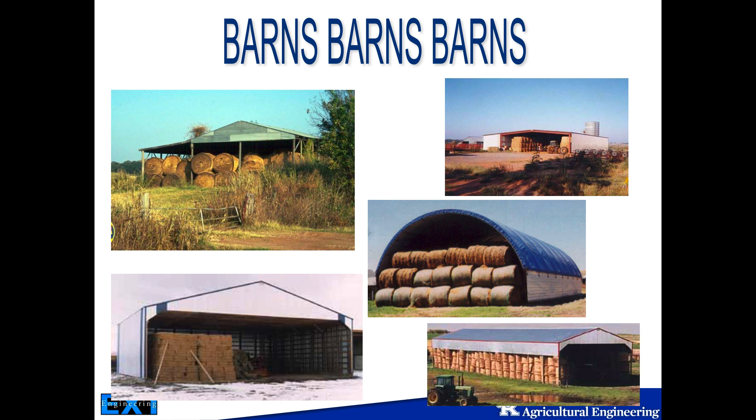You can always retrofit old barns, you can add sheds, you can have metal barns, hoop barns. I don't know how they got the hay in like this, don't ask. There's not a good solution, don't do that, unless you have lots of time on your hands and you're just looking for fun. Creative solutions. And then of course the square hay there in a metal-sided pole barn.

One of the big things I think a lot of people don't spend enough time on when thinking about a hay barn and putting up a new barn is the site selection for it. I see a lot of barns that are not in the right spot, or there's not enough space around the barn to turn around trailers and equipment, where the barn is in a low spot because that's where the drive was. Then all of a sudden you have all that water coming off a hillside, and on a year like this, you know how much water comes off the hillside and ends up in the bottom of your barn, and you don't have enough rock and it doesn't drain properly.

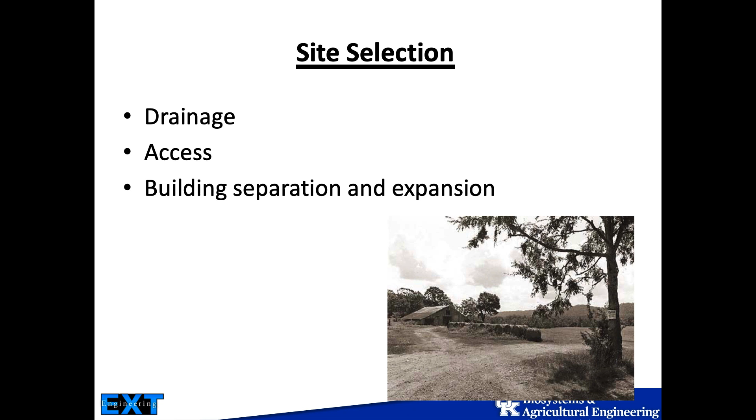So that's a big problem. Drainage is critical, access is critical, and building separation I put up there because of fire risk. This is a trade-off. If we put enough space between our barns for fire management, to make sure barns are protected from other barns and that we can reduce the risk of fire spreading between barns, we have a lot of space between our barns that we have to mow and manage, or spray, or gravel, or do something with, which is a real big pain. So you have to make that decision yourself and how you manage your risk as to how close together you want your barns to be.

We want to avoid low spots and steep slopes. We want the water to drain away from the barn and access area. It's actually a pretty steep slope that's recommended for moving away from the edges of the barn back to the ground - 5% slope. That's not a slope that I really want to drive my tractor on. That's a fairly steep slope that we're looking at here.

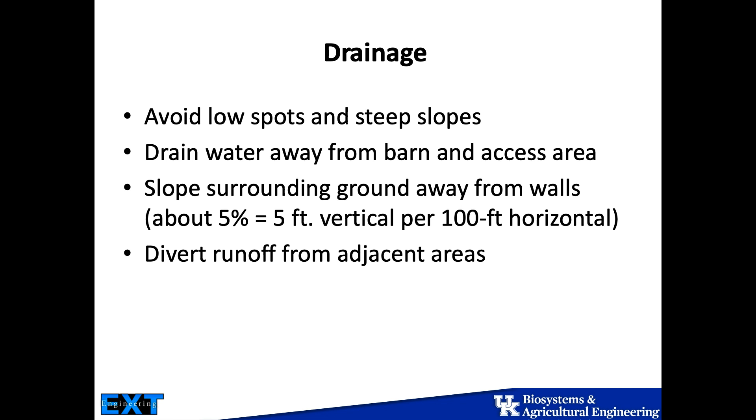And we're diverting runoff away from adjacent areas. So if we do have gravel areas next to our barns, we don't want the water from those gravel areas also running into the barns. We want to make sure that's all sloped away as well.

For access, we want to plan for convenient access. That means we need to be close to our roads. We want to avoid having a lot of gates, because when people are coming in and buying hay - if you're only delivering it, maybe you can handle your own gates yourself, but if you're selling hay and people are coming to pick it up, gates are not necessarily your friend, they make more work for you. On the other hand, no gates means no security. So there's a trade-off there as well.

And then you also need to keep in mind your distance from your hayfield. So setting up a convenient spot for people to purchase hay might not necessarily be the same spot that your hayfields are at.

So you need to balance those two things, because when you're trying to beat rain, which as Josh just said, we had to beat rain a lot of times this year, distance from the hayfield can be a critical component to making that happen.

We want security from fire and from theft. There are definitely people that will steal hay. We need to have some sort of security, lighting, other things like that on the site, preferably visible from a house. Those are things that we really want for the security of our product.

And we need roadways and turning areas to allow ample space for trailers, bale wagons, things like that. 75 by 125 feet is what is recommended. That is a very large gravel pad. But if you've ever seen someone turn a trailer who doesn't know how to drive a trailer, you know why you need that much space.

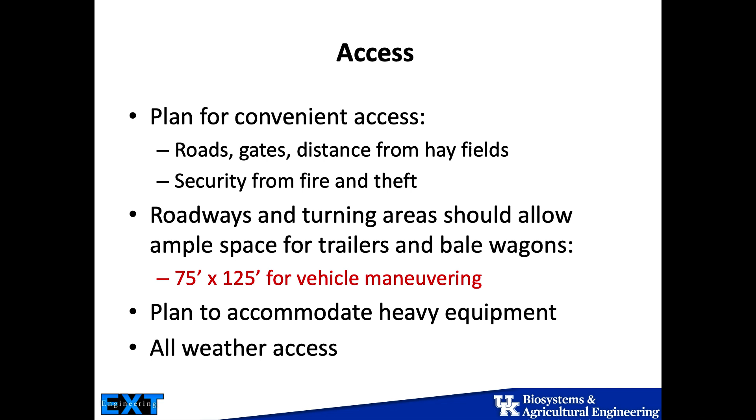Plan to accommodate the heavy equipment. That means you have all-weather access. You've got to have your filter fabric down and build your drives properly, larger rock and then smaller rock on top, because that's what's going to hold up to the heavier equipment and bigger trucks. I know sometimes people just throw another load of rock on the drive year after year, which is fine, but a more cost-effective solution is to build the proper drive the first time and not have to spend that money year in and year out, hopefully.

Don't build it right now in the mud. As a side note, this is not the correct time of year to be building a new driveway. Wait till it dries out, it'll be a lot easier.

So spacing is that compromise between safety and practicality. 75 feet between barns is actually a pretty large amount of space. And honestly, even at 75 feet, if the fire really goes hot, I'm not sure you can stop the next barn from going. Some people will say 50 feet between barns is enough.

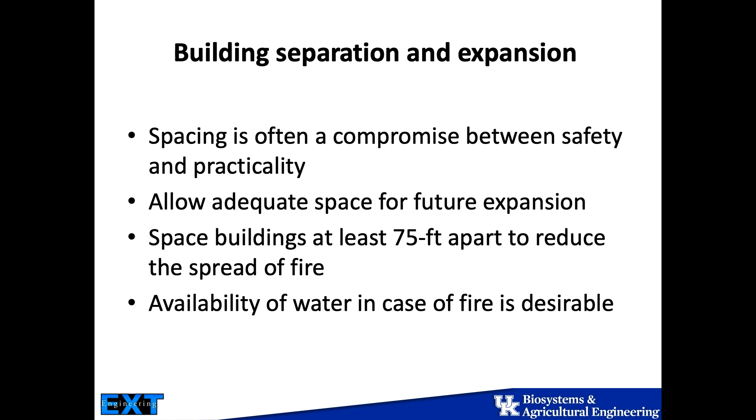You should know where your water sources are in case of a fire, because when they come out there, they're not going to be as prepared as you are. That should be in your contingency plans, knowing where that water source is. And if there's not a good one available, you should be telling them when you call that there's a fire, so they can be prepared to start bringing enough water with them. Does that make sense?

Barn sizing. This is one of those really big challenges, sizing the right size barn. And I think this is really site specific. You need a certain amount of space in the building, a certain footprint to hold the amount of hay you're looking to do. One of the things I think is sort of interesting is how people type or grade their hay will determine the size and layout of barns you need.

So if you're a person where different fields have to go into different bents or things like that, you might need more smaller barns to be able to access all that hay at one time, or you need to have the barn oriented in a different direction so you can access a lot of areas on a barn.

If you are first in, first out, you just need to set up the barn to be able to put the hay in the way you want to and pull it out. This is very much dependent on how much hay and the types of hay you're doing as to how you're going to lay this out.

I know I sound like I'm dying. I might need it eventually.

And then there's storage capacity. You're always going to want more storage capacity than you need, but you're basically paying for the barn. That's an upfront cost, and you have to cost it out over how much hay goes into it. So if you oversize your barn too much, you'll have a hard time paying it off at the right time, or you'll have to pay too much per bale that goes into the barn, and you'll price yourself out on storage.

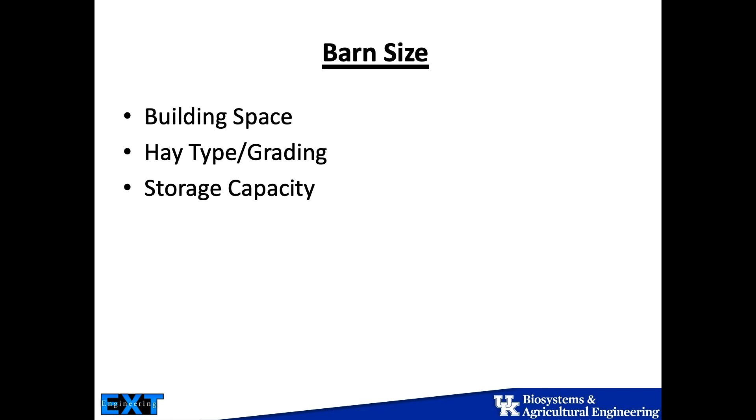As a rule of thumb, if I'm figuring out my building space for square bales, I need about 10 to 15 square feet of footprint area per ton of square bale going into a barn, and about 16 to 24 square feet per ton of round bales going into a barn. These are very rough estimates. The size, the shape, how high you're stacking, things like that will all influence this number.

But just as a rule of thumb, that gives you an idea if you're trying to figure out how many square feet you're targeting, because next year you're going to increase by 100 tons. This will give you an idea how many square feet you need in storage to get to that number. It should give you a rough idea.

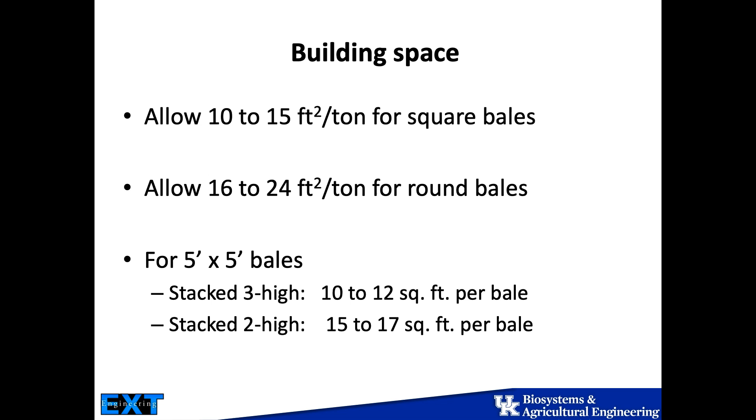For 5x5 bales, when you stack 3 high, you only need 10 to 12 square feet per bale. When we stack only 2 high, we're at 15 to 17 square feet per bale. So that's an indication of how that height makes a major difference.

So again, how do you manage small squares, large squares, round bales? How many bales? Are you grading? Are you cutting different fields? Are you accessible from both ends or from multiple sidewalls?

This is something I see a lot of people struggle with: they set up these really nice barns and only have access from one end. More so with hoop barns is where I see this. Most people who put in a pole barn typically can access both ends because there's usually a sliding door on both ends, and they typically put a drive around the whole barn.

But with hoop barns, people will put in a large hoop barn and only have access from one end. From an efficiency standpoint, when we go to a 96 or 120 foot long hoop barn, we spend a lot of time in our logistics bringing bales in and out because that's a long barn to move in and out of. So if I'm trying to move hay in the summertime, that can be a challenge. If I can get access from both ends, I can be much more efficient. Also, I could use the barn for two grades or types of hay. So really thinking about that early in the process and the siting can make a major difference.

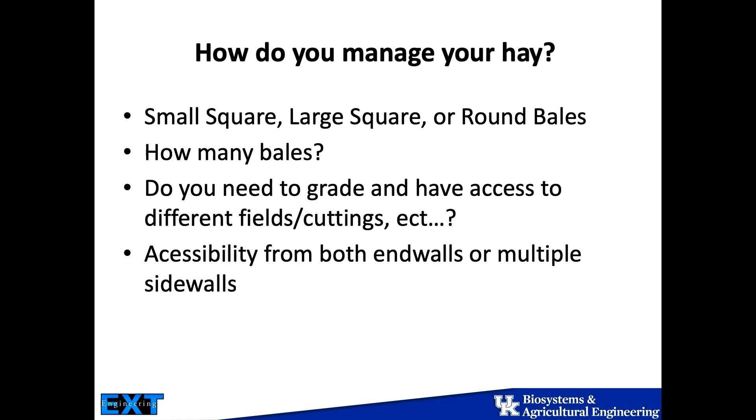So this is just an example of a 5x5 round bale storage capacity in a 32 by 64 pole barn, a 36 by 64, a 42, and then a 48 by 64 foot. This 64 foot long barn, we're really going to lose 4 feet on it because the 5x5s don't take 64 feet, they take 60 feet to stack in that barn, and it has all of them stacked on end. But it just gives you an idea of how much access you have, how many bales you can store based upon having side access versus end wall access. So how you orient your bales and how you set them into the barn will affect how much hay actually fits.

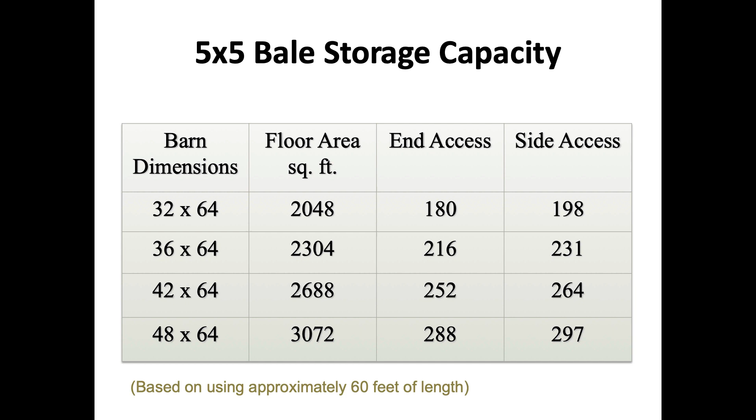Which is kind of interesting to play with. Also, barrel stacking bottom bales on round bales will change the number of bales you can fit in a barn typically as well, certainly on the 5x6s and the 4x5s.

One of the rules of thumb when sizing your barn: if you're going to stack 3 bales tall, these being 5x5 bales, you're going to need about 14 feet to get all 3 bales stacked up. If I was putting in a barn like this and wanted to stack round bales into it, I'd add another 2 feet at least to the bottom of the truss, because inevitably I will hit that truss with my equipment if I don't give myself adequate space to move stuff in and out.

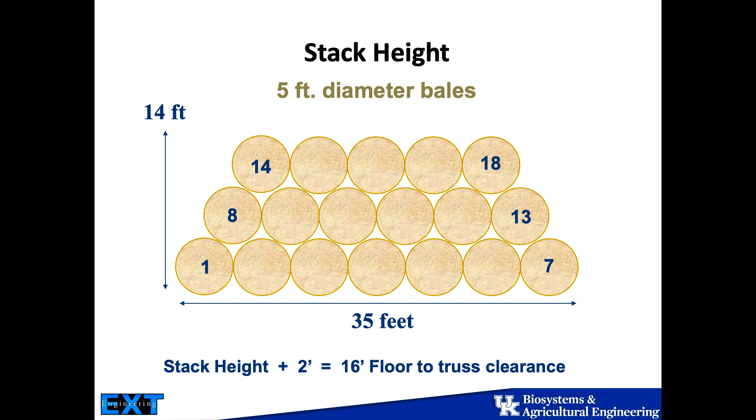Same thing with square hay. I still need at least 2 feet between that bottom bale and the bottom of the truss. I see a lot of hay stacked right up on top of that truss. If you're hand moving that hay out, it's not a big deal, but most of you are looking to mechanize your system. You're going to bring in a grapple or something like that, and you need space there so you don't destroy the structure.

And so 2 foot above the top stack of hay is really important. Same thing here. If I go to a 6 foot diameter bale, all of a sudden I'm almost to 19 feet from floor to truss clearance to get that hay in that barn. So now I'm actually costing myself into a fairly high level because it costs quite a bit more to have my eave height on a barn above that 16 foot mark. So I'm really going to be playing with my numbers here if I'm siting a barn and trying to fit it into a space for 5x6 bales. If I want to give myself enough space to make sure I secure those trusses, it can be a big difference.

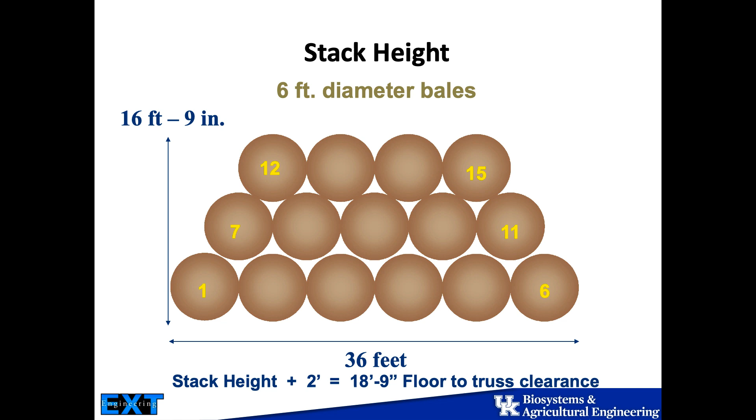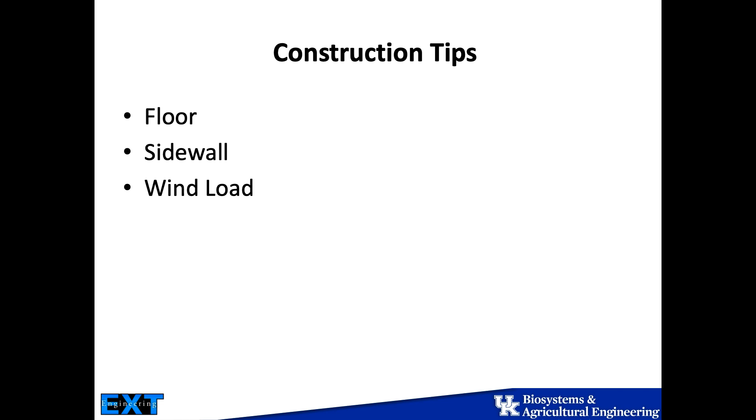Construction tips. So these are just things that I would suggest as you are having someone build a barn, or working on that, you really think about pretty early in the process, and make sure that you harass your contractor if things are not going the way you're hoping.

The floor and base. Compacted gravel's an option. Geotextile under compacted gravel is a much better option. Even though you may not think you're moving a lot of equipment in and out of the barn, you're going to run equipment in and out of the barn a lot of times. Putting that geotextile under the gravel will really maintain the gravel life. And when the ground gets soft like it is this year, that mud will work up amongst the rocks and it will actually cause the rock structure to break down quickly. We really, really don't want that because that basically destroys the structure, but it also allows the water to wick up into the bales more easily. Keeping that geotextile on the bottom won't allow that soil structure to come up amongst the rock, which will strongly expand the life of the gravel in the barns.

One thing I do see quite a few people do is put compacted gravel down and then put shipping pallets, rough boards, planks, something like that over the top. It will help with wear and tear on those bottom bales. It is a lot of labor to move it in and out, so if you're moving a lot of bales all the time, it might not be feasible to be moving pallets on the bottom. But if you can't figure out a market to sell bottom bales, you may have to consider something like this to protect those bottom bales to get the value out of them that you need. So that's really a site-by-site decision.

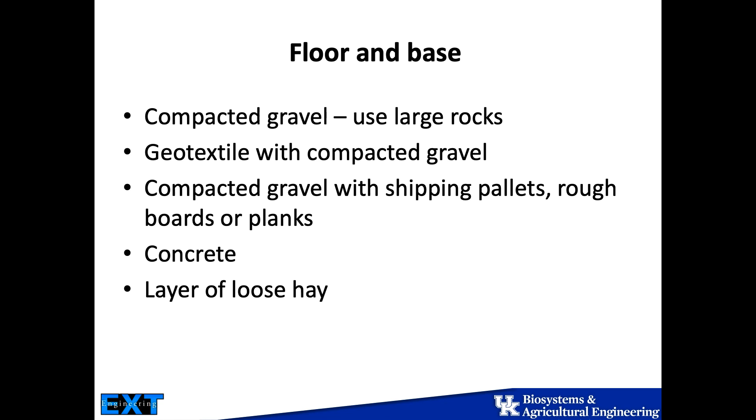And one of the things I do see some people do, although less now, is put a layer of loose hay on the ground or just not clean up the layer of hay from last year. That's not a terrible solution as long as the hay isn't holding water. If there's any moisture in the barn, that hay on the ground is not a great option. But if the barn is dry, it's not the end of the world to have a little bit of loose hay there. But it very much depends on your situation. I would prefer to see it moved out because any organic matter that makes it into the rock gravel base is going to eventually turn into dirt, which is going to then hold moisture amongst your rock.

If you have the time and energy, it is better to start with a layer of larger rock and then put smaller rock. Inside a barn, I would accept just smaller rock as long as it's at least 8 inches thick. But certainly for the drive areas, you want to do large rock and then small rock.

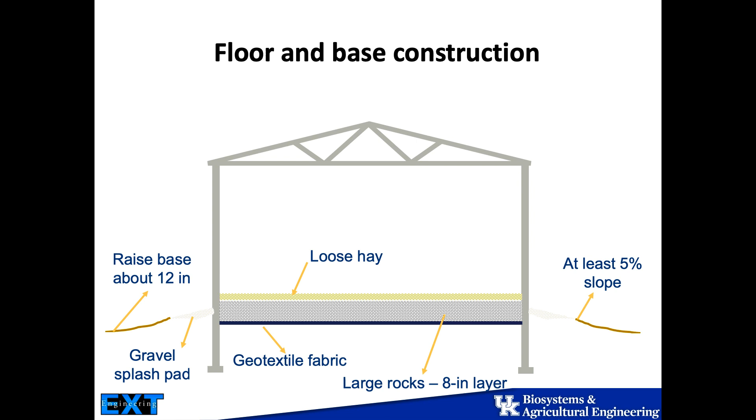This is probably the biggest challenge that I see: people will put hay up against sidewalls. I am not fully a structural engineer, I just teach a class on it occasionally. But post-frame construction does not expect a load, an outside leaning load on the posts of a barn.

The barn is not designed to handle that load. It's not built to handle that load. It is what will cause failure in that barn. Steel barns are maybe a little better equipped to handle the load, but they desperately need extra girts if people are leaning their hay out against those posts. Girts being the members that go across the barn that the metal siding is drilled into.

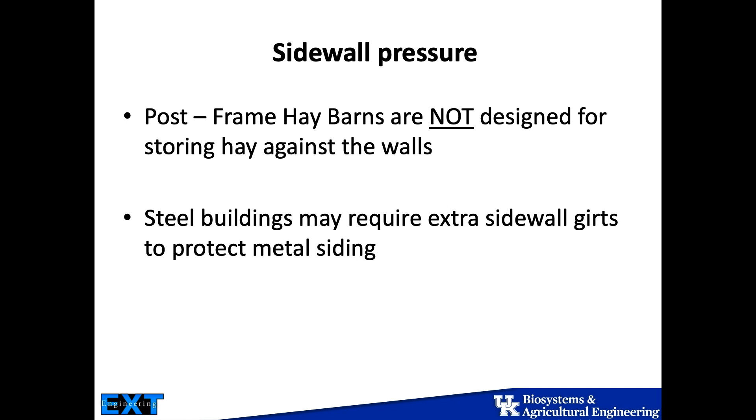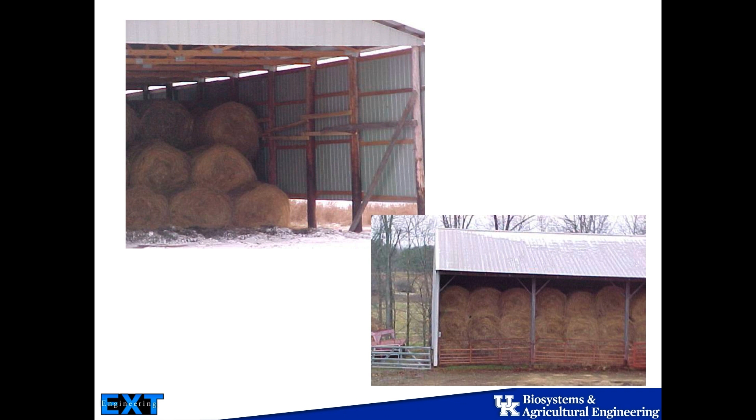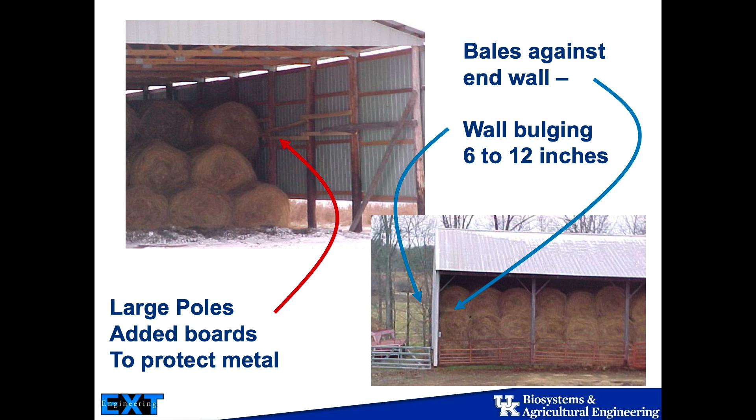You can see here, in this other picture, this barn wall is actually bowed out. So this is one where they have a sidewall opening and their end wall is actually closed, and the wall is bowing. That's just a sign that the barn is not going to last the lifespan you expect it to. It's bowing 6 to 12 inches there, so yeah, those added boards, they're not a solution. You still have a problem.

The last construction thing I want to point out is that hay barns, and we'll talk about ventilation next, but hay barns are typically partially open, and as a result they have a lot of wind load on them. And the wind loads are not necessarily even.

So if I have a completely closed barn, and my wind blows from the left-hand side for you guys here, and I've got my posts 8 foot on center, which is a pretty typical pole barn, and these walls are all closed off here, I will have upward force of almost 2,000 pounds on each post. I have some downward force because I've got the weight of the roof coming on it, so they kind of counteract each other, but I still probably have some upward force on that barn.

40-foot wide barn. What happens if I take one of those sidewalls out? All of a sudden, I have almost 6,000 pounds of upward force on the posts on the side that doesn't have sheathing on it, and 3,000 on the other side.

So if I'm going to put in a hay barn, I really want to be conscientious of the fact that my posts have to be embedded in the ground correctly, and my trusses have to be sized and noted for an open-sided building, because that's how I actually get a structure that's going to stand up to the wind, and I'm not going to lose my roof and or my post when we get the 50-mile gust.

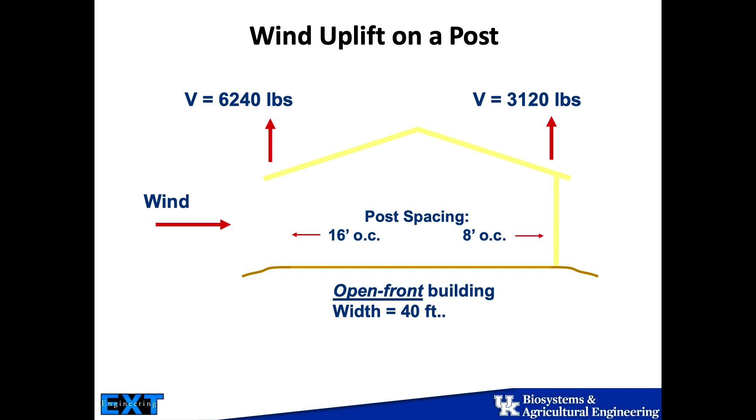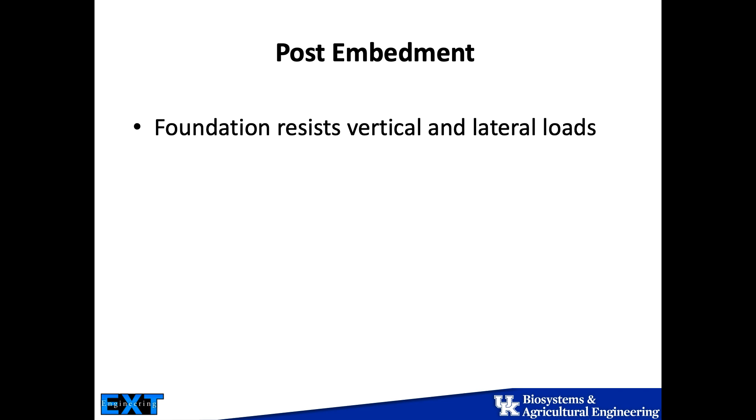For the post embedments, a foundation will resist the vertical and lateral loads, which is good because it will help if you decide to roll your hay onto your sidewall and then your post bows out. But it also is really important for that wind load we just talked about. They shouldn't be less than 4 foot in the ground, and for taller posts we probably need them even a little bit deeper.

5 or more foot. And we also really want concrete under the posts. It's basically a collar of concrete we want. So one of the things I do see is people will make a nice 4-foot hole and then pour concrete. They'll put the post in and pour the concrete from there all the way up to the dirt.

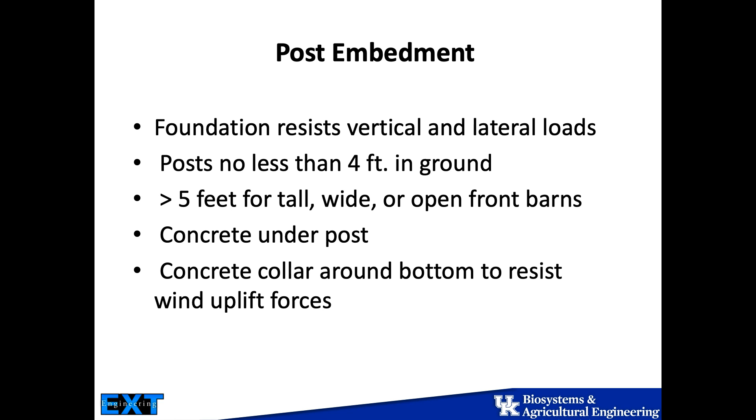And that's not actually what we want to do when we're putting this concrete in. I know that's a big piece of concrete and that makes you feel better. But what we really need is the concrete only to be at the bottom of that hole, below the frost level. And we need actually a fairly wide opening at the bottom. So we want to put a lot of concrete down there, but we want it low in the ground.

And then we want the dirt on top of it to hold that concrete in the ground. That collar basically resists the upward force. It makes a big surface area so that the whole thing can't lift out. It's the same as putting - has anyone ever put a post in the ground and poured concrete all the way to the top, versus putting a post in the ground with concrete at the bottom and then putting dirt on top of it and tamping it in?

If you try and pull out that post and it's concrete to the top, it's a pain in the butt. If you try and do it and you've properly set the concrete at the bottom and then you've tamped your dirt on top of it, you won't be able to pull it up. Same concept here.

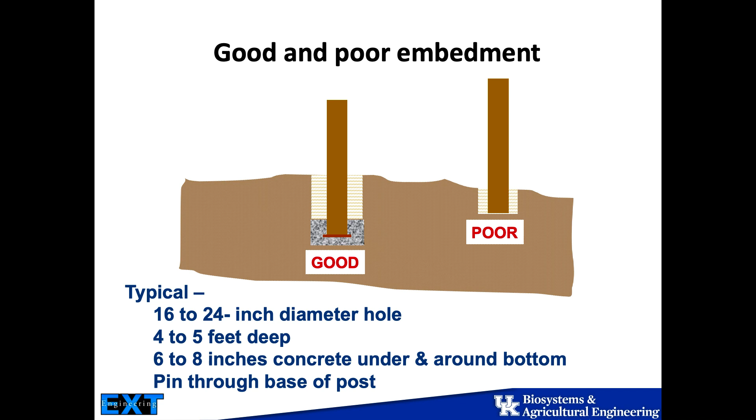Best of all, please, please, please do not put it like 6 or 12 inches in the ground because you hit rock. That's really not a good solution, but I see a lot of it. And that's what it looks like when it pops out there. That's not a good sign.

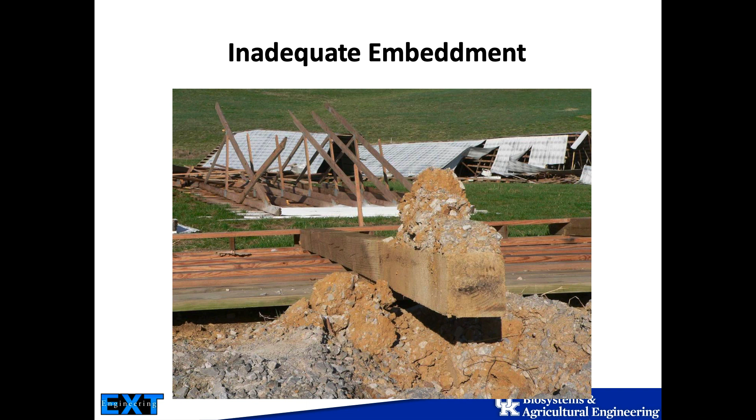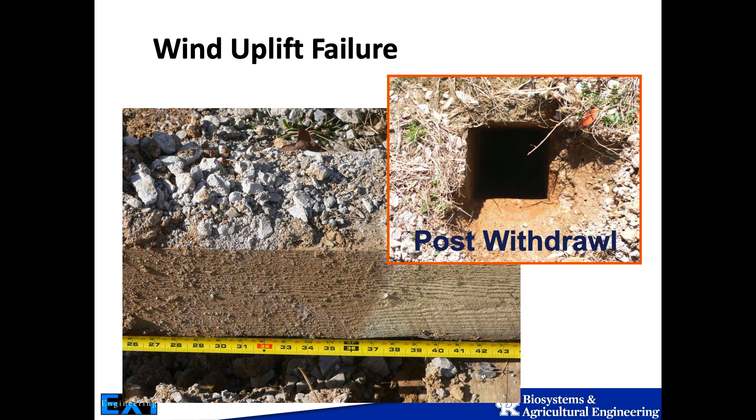And that's another uplift post-withdrawal. One of the things I will say is I had a tornado hit my farm last year, and we properly set all of our posts, and even properly set, I can see where all of my posts lifted about a half inch on one side of my barn. But because they had proper collars on them, I have torques on my hoops and things like that, but I did not lose my posts. Over 100-mile-an-hour winds.

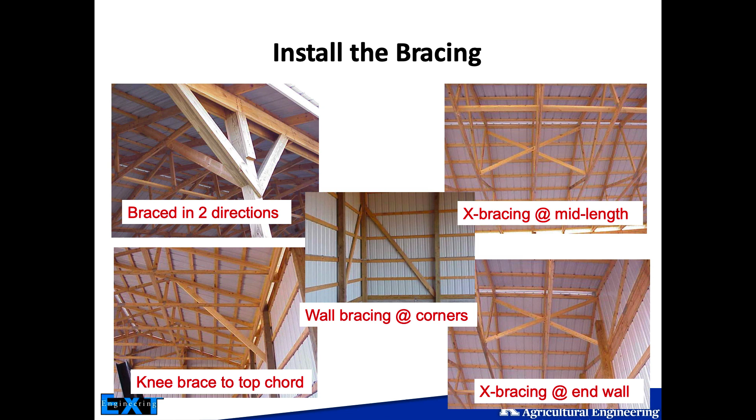And then, of course, you want X bracing as well on your end wall as well as in the middle of your barn. So lots of bracing you should be seeing. If you're not seeing someone coming in and installing bracing when they're installing a pole barn, you should be questioning why they're not doing that for you. It doesn't cost much money, and if they tell you that you have to buy a couple more pieces of wood, you should be buying more pieces of wood to get that done.

Am I doing okay? I'm running a little late.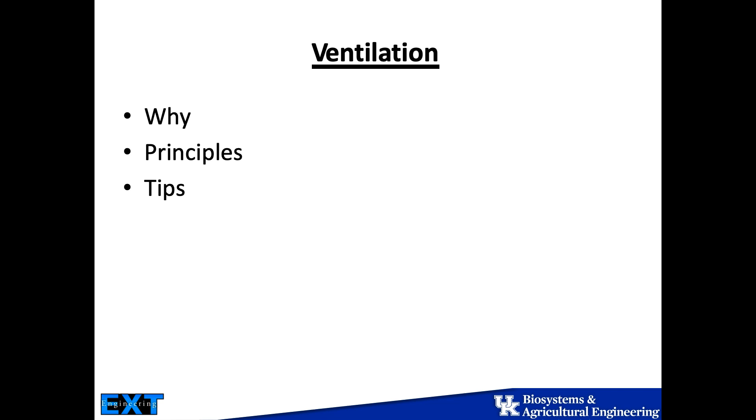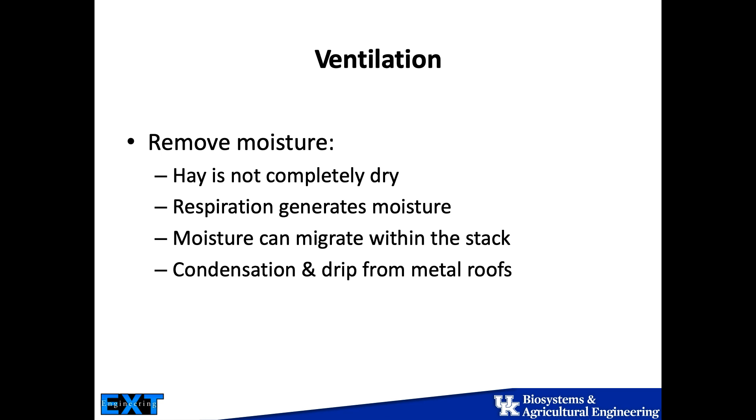The reason we ventilate the barns is to remove moisture. Hay does not come in completely dry. Respiration generates moisture. Moisture migrates within stacks of hay. Condensation and drip from metal roofs will also come back down into your stack of hay within a barn. So we have a moisture we need to handle, and in order to do that we need ventilation within our barns.

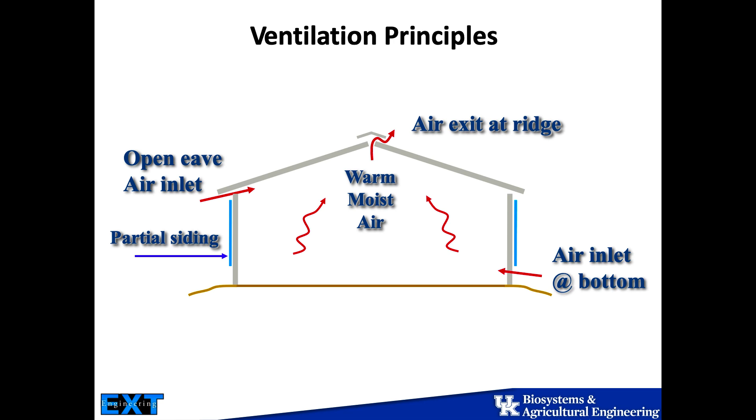Ventilation principles: the concept here is that we let air come in somewhere low on the side of the barns, and then we have some sort of opening at the top to let the air out. On pole barns, we need some sort of covered ridge cap for that to happen. If our barn is more than 70 feet long, we need some form of ridge opening. If our barn is only 62 foot, we can probably get away without it, but it's always better to have one.

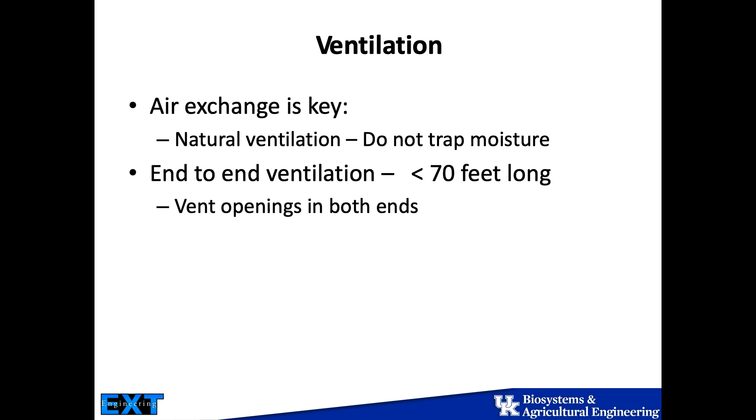Especially on hoop barns, but also sometimes on metal-sided pole barns, there needs to be a little opening at the bottom of the barn, because as heat generates, if we can bring in cool air right at the bottom, it's going to come up all the way through the stack of hay. A lot of people are afraid to leave openings down near the floor of the barn, but that's really useful for getting air movement through the full stack of hay.

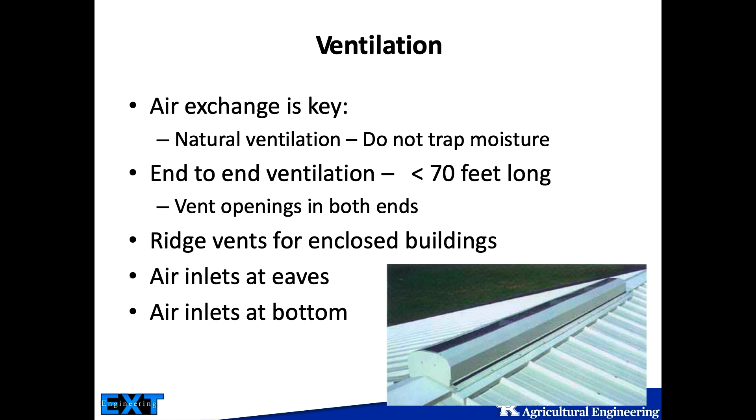So on a barn like this, I might put one piece of metal down the side, but I wouldn't put two pieces and drop it all the way to the ground. That would be too much enclosure on the side of a barn. Any questions?

When you were talking about setting posts with the concrete column—yeah, we built a barn in Virginia at the research station, and it was pretty well engineered, I thought. They actually drove pieces of rebar, drilled those posts out, put pieces of rebar in, and poured concrete around the bottom of the post.

Yes, so if you put rebar through the bottom or some sort of attachment on the bottom, they also make things you can set the post into that stick out on the sides, so the concrete can't slip away from or crack away from a wood post, especially a square wood post, because it doesn't attach well otherwise. The rebar will work further out into the concrete and really ensure that if there's a heaving motion occurring, the concrete's going to hold it down. The rebar should be maybe 9 or 12 inches from the bottom of the post.

Anything else? Yes, sir. On the hoop barn, it's not so bad, because typically as long as we have maybe 5 or 6 foot on our sidewall—6 foot for sure on the sidewall for a 5x6 bale—you should be able to get them in. You can't barrel stack and do it, you won't have the height for that.